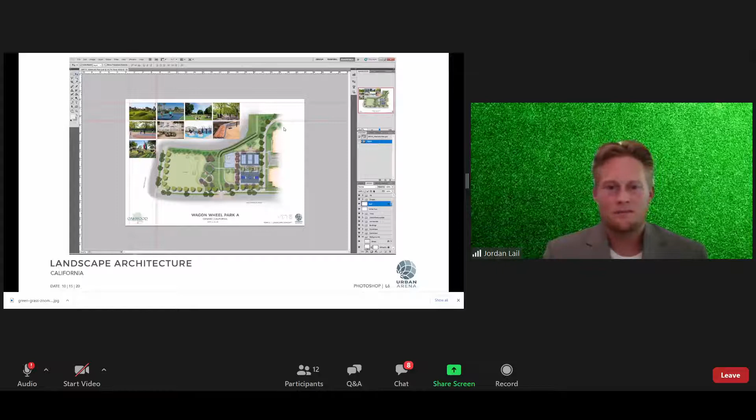That used to be the primary tool for presenting projects in the early phases a decade ago. That brings me to my next program, SketchUp, which is a three-dimensional program you can actually build a model in.

This is, I'd say, an even more powerful tool, and typically much more commonly used these days for presenting projects in the earlier stages, just because it really helps people understand the space that's being built.

Having all this in three dimensions gives a full and better understanding of the space. It's a really powerful, helpful tool, not only to us as designers, but also to clients, cities, and communities—wherever we're presenting our ideas—so they can really understand what's going on.

So I'll get into some more projects here. This was created with Photoshop—another preliminary site plan.

The reason I pulled this one up is I wanted to get into some projects going on here in San Diego. This one was actually recently built in the UTC Mall—it's a large apartment complex. I'll show some built photos of it in future slides.

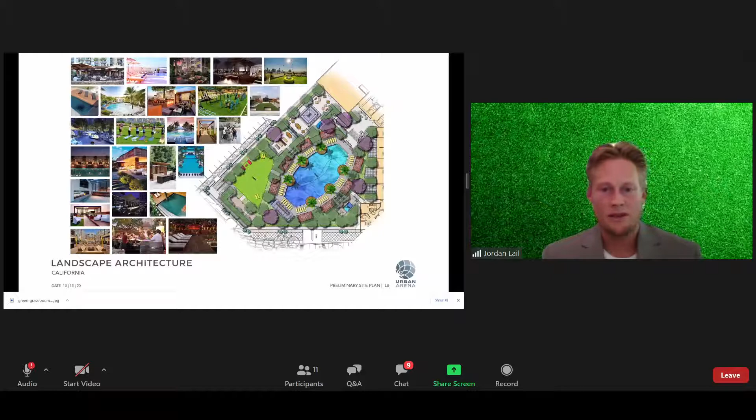This project turned out great. There are so many different seating areas and opportunities for gaming, swimming, lounging, and seating. We're really trying to create a space used by lots of different groups, large and small—all these things we have to think about when designing this.

So from that preliminary site plan that's two-dimensional and colored, we started using SketchUp modeling to build these in a three-dimensional thing, to once again help everyone understand the real intent behind our design and what it would look like when it's built. What I did here is I have some 3D rendering photos from SketchUp, but then I also put next to it some actual photos of the site once it was built, so you can compare and contrast how real these programs can make the spaces look and feel, and how close you can actually get to constructing some of this stuff in the computer model to when it's actually built. It's pretty impressive, pretty neat stuff.

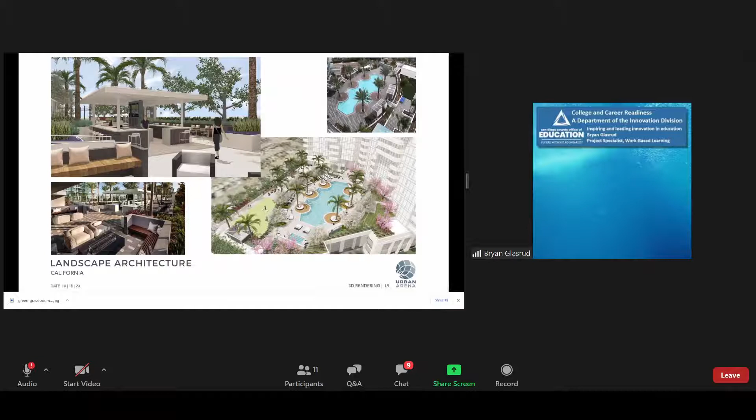Hey Jordan, can we jump in really quick? Yeah. So we have a couple of questions specific to the software. How long did it take you to master computer-assisted design? And maybe what specific program do you guys use?

Right now we're just using AutoCAD 2020, I believe. They come up with an update every year. To be honest, it probably took a year or so to get really comfortable and move pretty quickly in this design. I know a lot of the courses offered for a semester or a quarter at schools are a great introductory tool, but they're not going to get you to a more advanced level. That's why I was emphasizing the importance of practicing these on your own, because they really do take a long time to get comfortable with.

We primarily just use AutoCAD for two-dimensional stuff. There are three-dimensional versions of AutoCAD that architects and some engineers use. We don't, but these programs get even more complex, and you can use them for a wide variety of tools for a wide variety of disciplines. There's a lot on here—just this screen showing all these icons. I've been using AutoCAD for almost 20 years, and I don't even know what all these buttons do because some of them I've never used or needed to. So yeah, I'd say it probably took a good year to really get comfortable with it, using it almost every day.

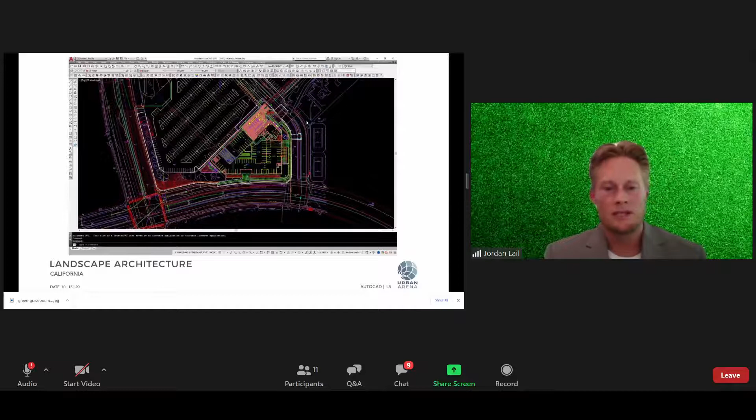And one other question tied to software: is SketchUp easier to learn than AutoCAD, Solidworks, Revit, etc.? Yeah, I think so. I downloaded SketchUp or started using it a while ago when Google was making it, a few years ago when it was still free. It's different than AutoCAD—there's a lot of things AutoCAD does that I wish SketchUp would do, and a lot of things SketchUp does that I wish AutoCAD would do. But just to learn it outright, I think it actually is easier. The only time SketchUp gets a little difficult is when you're editing a model that maybe somebody else did that they didn't build the way you would, where AutoCAD's a little easier to work with in those regards. But yeah, I think SketchUp was a little quicker and easier to learn.

This is a really fun tool. It's great—used by interior designers, architects, landscape architects. Even if you're thinking about remodeling your house or a friend's house, there are online libraries with different furniture, cars, people and things like that you can download and drop into your model, so you don't have to build all this stuff from scratch. It's a pretty cool tool, fun to use even on a personal recreational level. I know when we were looking at remodeling my house, I used it to show my wife here's what I'm thinking the house would look like, to really help her visualize it, and it was just great. It was a very helpful tool. You can even pick out paint colors and things like that.

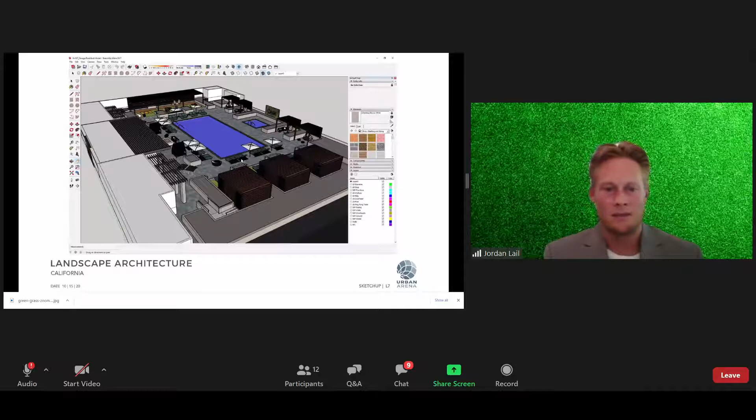A fun tool to have, and yeah, I think a little easier to learn. This one I don't think would take a year to master by any means—much quicker to get a handle on it, maybe a week or so of really immersing yourself in it, and you'd really have this one down. Perfect, thank you. Yeah, of course.

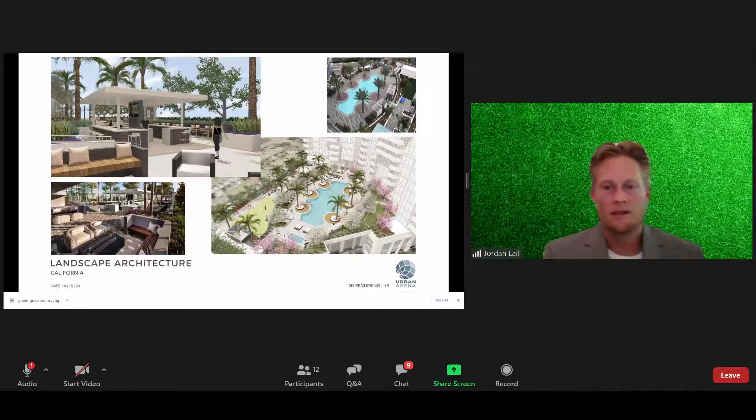So here, once again, some shots of this project in UTC that we did, which is built and open. Now they're renting out the apartments, but it's really cool. It was fun to design this one. We were even getting down to the specifics of what plants would be used where, really helping the client see.

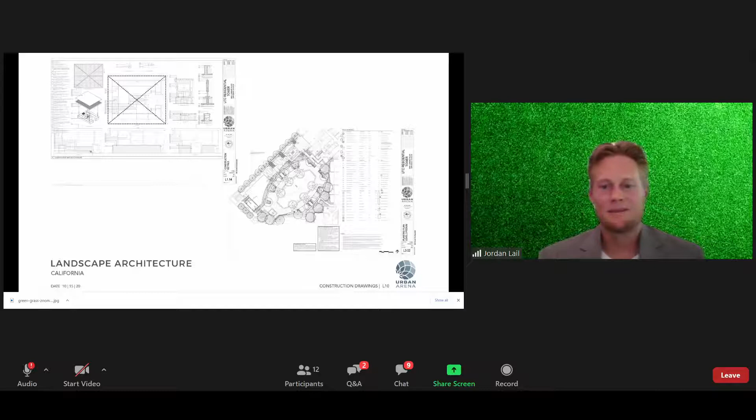Here's a video, a little fly-through that's created. This is also some fun stuff that we do. We take some of these SketchUp models and drop them into other programs to create fly-throughs to really help sell bigger sites, where you're not just going to see it in one scene, but you really want to fly through the whole model. I'll just let this play through briefly.

Jordan, while that's playing through, we had a question. Do you have a horticulturist on staff?

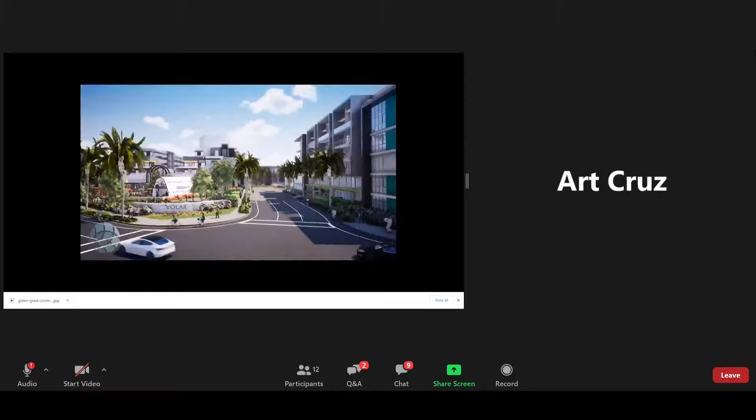We do not. I think everybody who works with us has gone through the landscape architecture program and knows plants fairly well. They went through plant identification classes, so we learn a lot of Latin, learning all the plant names, especially the common ornamental plants used here and a lot of the California natives. So we don't have a horticulturalist, but everybody that's gotten their landscape degree has a good understanding - some of the requirements are soil science classes and plant identification classes. So you do have a good fundamental background knowing about plants, but not necessarily a horticultural background. That's a slightly different skill set.

Some of the projects we work on are like wetland restorations and things of this nature, where we're designing pathways that go through the wetlands. But they will bring on different botanists and horticulturalists, arborists, things like that, to help come up with different plant palettes and work with us on those types of projects.

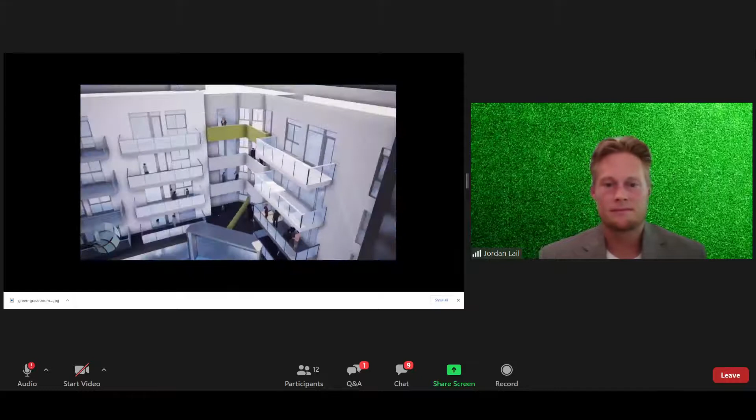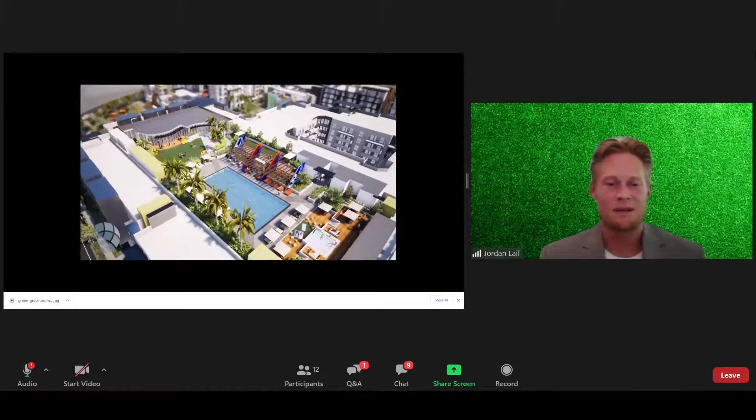So this is a fun apartment complex. This one's still in the design phase, but another example of crazy ideas we're trying to come up with - new, fun, unique experiences. In this apartment complex, these are rooftop amenity areas where we're looking at using old fuselages and pieces of planes from retired airplanes to actually be part of the project, just to create a new, unique vibe and something different people haven't seen before. Something to really help the client sell this apartment versus the apartment next door. Just one example of some fun stuff - I'm not working on this one personally, but it's being worked on by our firm currently.

Hey Jordan, where do you guys come up with these ideas? Like, who would come up with the idea of using an airline fuselage as potential housing?

Sometimes we have brainstorm meetings where our principal will call the entire office, get us all on a call together, and everybody just spitballs out ideas. We got a new project coming in, it needs to be different, it's going to be located here, this is kind of what it's going to be - what do you guys think we should do for it?

And so quite often we have meetings like that where everybody comes together and just starts throwing out crazy ideas. Our principal has a motto that no idea is a bad idea, because even if it's not used, a lot of it leads to another idea or concept. So a lot of times coming up with a theme isn't necessarily from the client or something that the client wants. It's just us coming up with fun, unique, creative things to try to have something new. And sometimes it sticks, sometimes it doesn't. Sometimes we present something like that to a client and they'd be like, you want me to do what? Get pieces of airplanes? I don't think so.